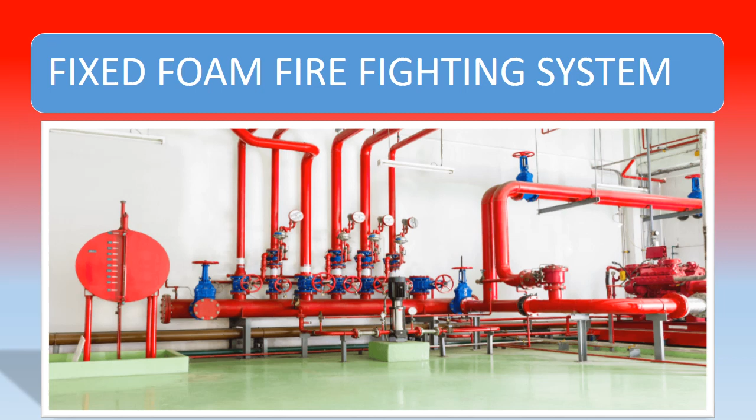Today we are going to see the continuation of the earlier part, fixed foam firefighting system 1. This is part 2. In this one, we are going to see the various regulatory requirements and some of the definitions related to the fixed foam firefighting system, which you generally find on tankers, and it can be utilized like your high expansion foam in the engine room and the low expansion foam on the deck.

See the various foams. Now the foam concentrate compatibility part. Means can one type of foam be mixed with the other? So we are going to see about the compatibility. The various foam concentrates are fundamentally incompatible with each other and should not be mixed in storage. In the system's storage, it cannot be mixed. The system should be thoroughly flushed out and cleaned before changing the new agent.

Means one type of foam was there earlier. You have to remove, drain and completely flush, neat and clean, and then you can put the other one, as a synthetic concentrate may dislodge sediments and plug the proportioning equipment. What is the problem? If you are not flushing and cleaning the tank, it can cause sedimentation or sludge formation, and this will clog the proportioning equipment, and then your complete ratio is disturbed and proper foam will not be generated.

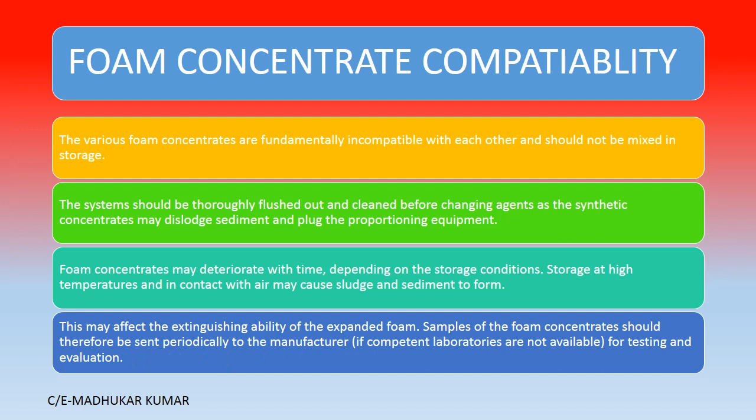That may affect the extinguishing ability, because if the foam quality has deteriorated over time, then definitely it is going to affect the extinguishing ability once the foam is expanded. Samples of the foam concentrate should therefore be sent periodically to the manufacturer for testing and evaluation.

Now we are going to see about the drainage timing. So what is this drainage timing? We have seen the expansion ratio, one of the important properties. Now the drainage timing measures how quickly a foam solution can move over a surface. This talks about the movement or fluidity of the foam. A solution that has a lesser drainage time moves faster over the surface, and it is generally checked as 25% solution and 50%.

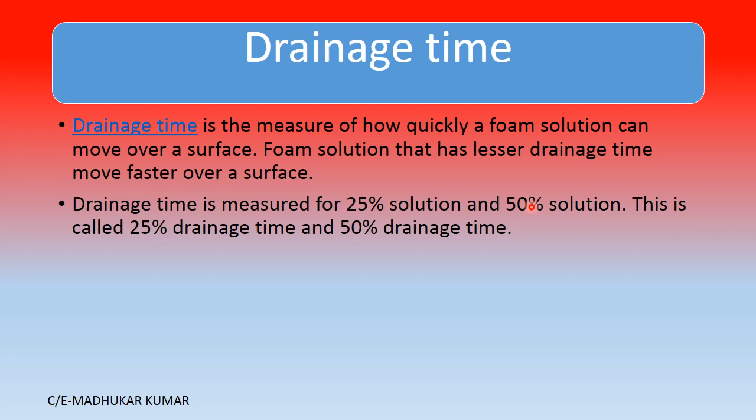Another test is the proportioning rate. Foam is generated by mixing foam concentrate with water, as we know already. For effective generation of foam in firefighting, a correct amount of water and foam concentrate is required. This is called the proportioning rate, and in that perfect ratio it has to be mixed so that proper foam is formed. It is also called the mixing ratio or the dilution rate. All three names are there.

So 6% foam concentrate means the ideal foam solution from this foam needs to have 6 parts of foam concentrate and 94 parts of water. So this is the meaning: 6% foam concentrate means 6 parts of foam concentrate and 94 parts of water.

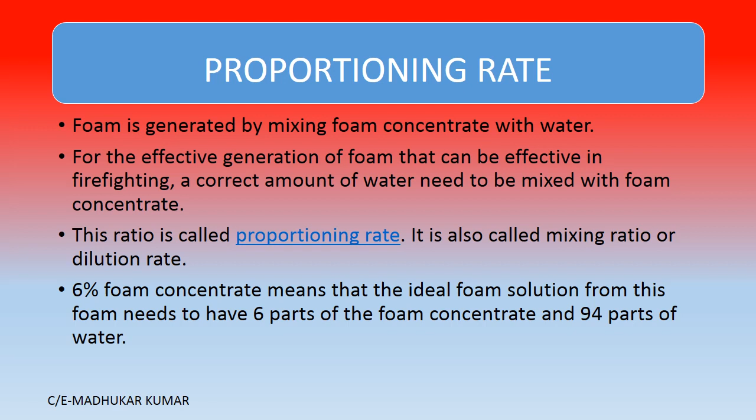Knockdown speed and flow. Knockdown speed and flow is the ability of the foam to flow on the fuel and around other obstacles. This is again talking about the speed with which the foam spreads over the fire surface. Good knockdown speed means that the foam is able to flow past the obstacles on the fuel surface within less time.

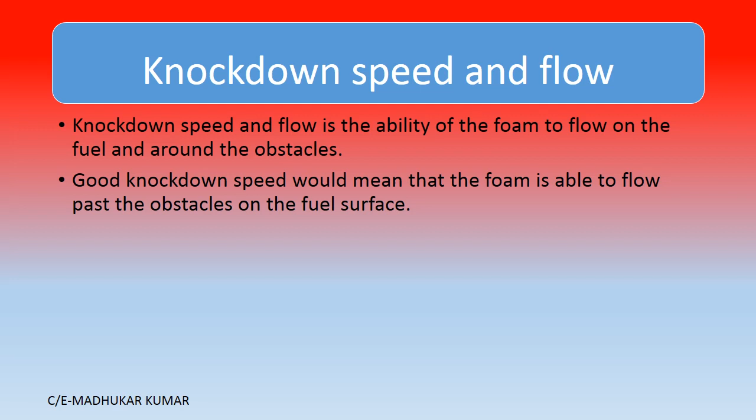What are the regulations for the fixed foam system on deck as per SOLAS? We will see some of the regulations regarding the fixed foam installation on deck. The arrangement for providing foam shall be capable of delivering foam to the entire cargo tank deck area as well as into any cargo tank the deck of which has been ruptured. So the calculation is based on both parts, the entire cargo tank deck area, and if any cargo tank deck is ruptured.

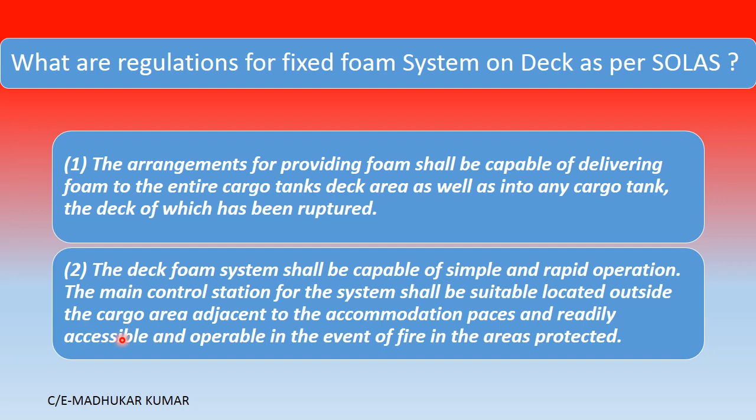The deck foam system shall be capable of simple and rapid operation. The main control station of the system shall be suitably located outside the cargo area, adjacent to the accommodation spaces, and readily accessible and operable in the event of fire in those areas.

In continuation, when we talk about the regulations: the rate of supply of the foam solution, that is the mixture of foam concentrate and water before expansion, shall not be less than the following, whichever is greatest. Regarding the foam solution supply rate, 0.6 liter per minute per square meter for the cargo tank deck area. 0.6 liter per minute per square meter. So this is the coverage area.

Okay, with the time it is being given. Where cargo tanks deck area means the maximum breadth of the ship times the total longitudinal extent of the cargo tank spaces, means all deck area completely.

6 liters per minute per square meter for the horizontal sectional area of the single tank having the largest such area. And 6 liters per minute per square meter for the area protected by the largest monitor, such area being entirely forward of the monitor, but not less than 1250 liters per minute. So this is another one.

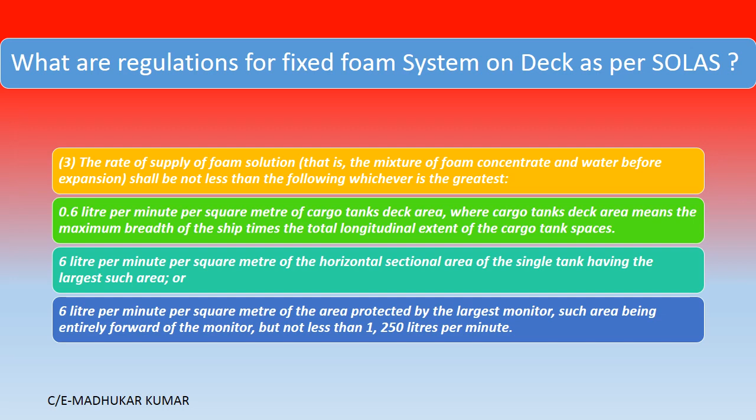The next requirement says sufficient foam concentrate shall be supplied to ensure at least 20 minutes of foam generation in ships fitted with an inert gas system. Suppose the inert gas system is fitted, then when we have a fire on deck, 20 minutes of foam supply should be there, as per SOLAS regulation, or 30 minutes of foam generation on ships not fitted with inert gas. If the IG system is not there, then 30 minutes.

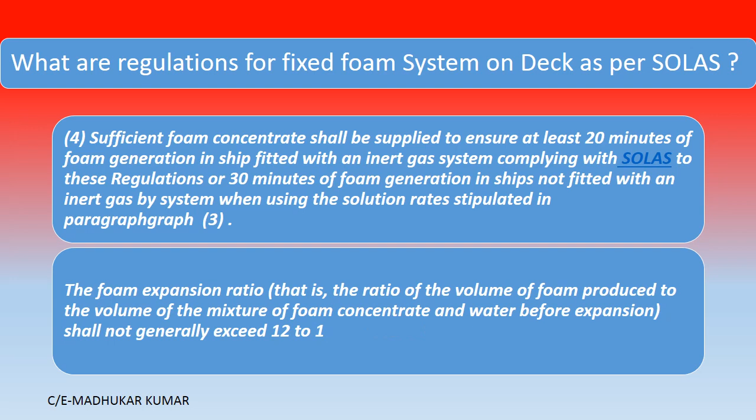The foam expansion ratio, that is the ratio of the volume of the foam produced to the volume of the mixture of foam concentrate and water before expansion, shall not generally exceed 12:1. What are the regulations for the fixed foam system on deck as per SOLAS? So we were continuing this one.

In this continuation, the fixed foam system shall be supplied by means of monitors and foam applicators. At least 50% of the foam solution rate required in sub-paragraph A and B of paragraph 3, which we have seen earlier, shall be delivered from each monitor. On tankers of less than 4000 tons deadweight, applicators may be substituted for an installation of monitors. So if the tanker is less than 4000, then you can have the applicators for an installation of monitors.

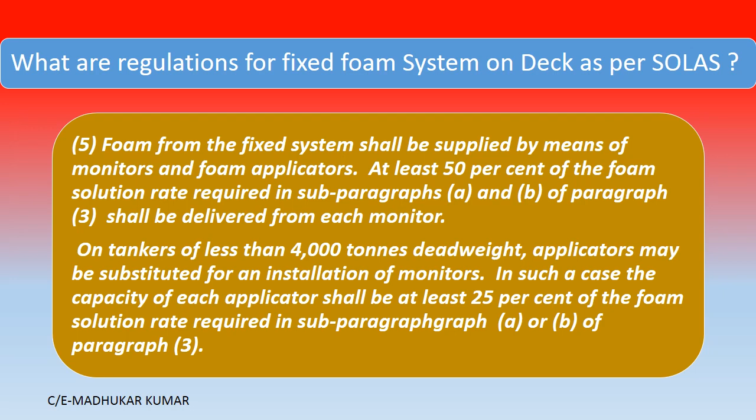In such a case, the capacity of each applicator shall be 25% of the foam solution rate required in sub-paragraph A or B of paragraph 3. So that means we have seen paragraph 3 and the rates given in liters per minute per square meter. Next, the number and position of the monitors shall be such as to comply with paragraph 1.

So we have seen in the starting, the capacity of any monitor shall be at least 3 liters per minute of foam solution per square meter of deck area protected by the monitor, such area being entirely forward of the monitor, and such capacity shall not be less than 1250 liters per minute. So this is talking about the monitor capacity, liters per minute.

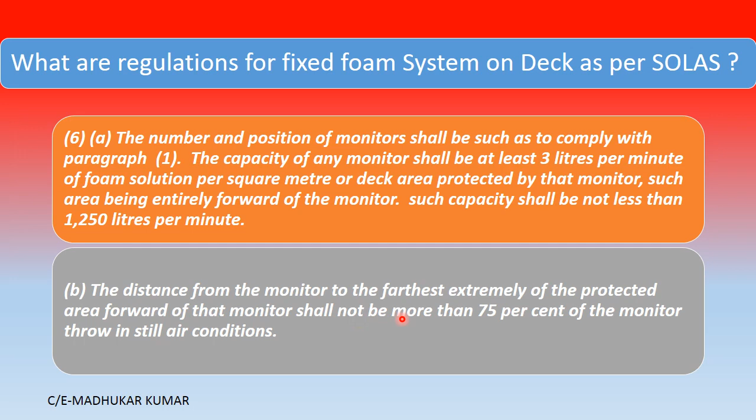The distance from the monitor to the farthest extremity of the protected area forward of the monitor shall not be more than 75% of the monitor throw in still air conditions. So it is talking about the monitor coverage: the farthest area to be covered by that monitor should be within 75% of the monitor throw.

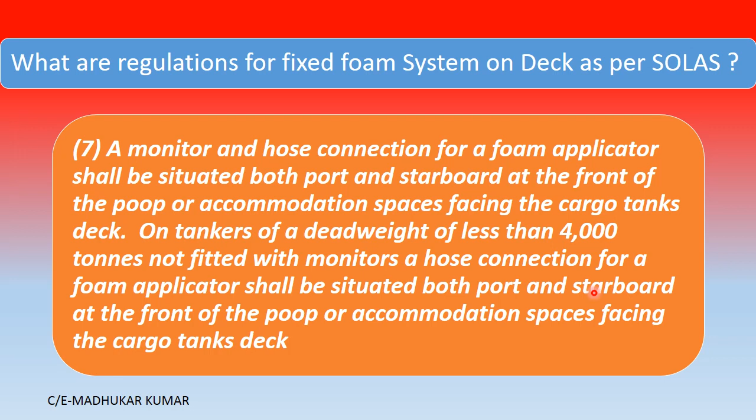A monitor and hose connection for the foam applicator shall be situated both port and starboard, in front of the poop or accommodation spaces facing the cargo tanks. On tankers of less than 4000 tons deadweight not fitted with monitors, a hose connection for a foam applicator shall be situated both port and starboard at the front of the poop and accommodation spaces.

Another one is the capacity of any applicator shall not be less than 400 liters per minute, and the applicator throw in still air conditions shall not be less than 15 meters. So the distance should not be less than 15 meters and the rate not less than 400 liters per minute. The number of foam applicators provided in accordance with paragraph 5 shall not be less than 4. So in any case, the foam applicators should not be less than 4.

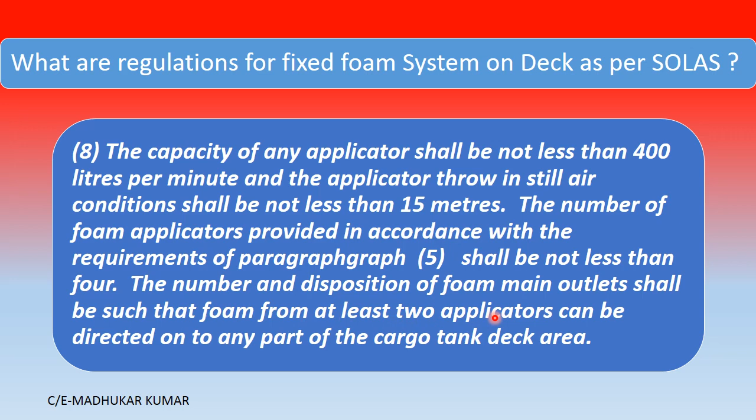The number and disposition of the foam main outlets shall be such that foam from at least 2 applicators can be directed on any part of the cargo tank deck area. Valves shall be provided in the foam main and the fire main, when this is an integral part of the deck foam system, immediately forward of any monitor position to isolate damaged sections of the mains. So this is the tanker requirement.

Operation of the deck foam system at its required output shall permit the simultaneous use of the minimum required number of jets of water at the required pressure from the fire main.